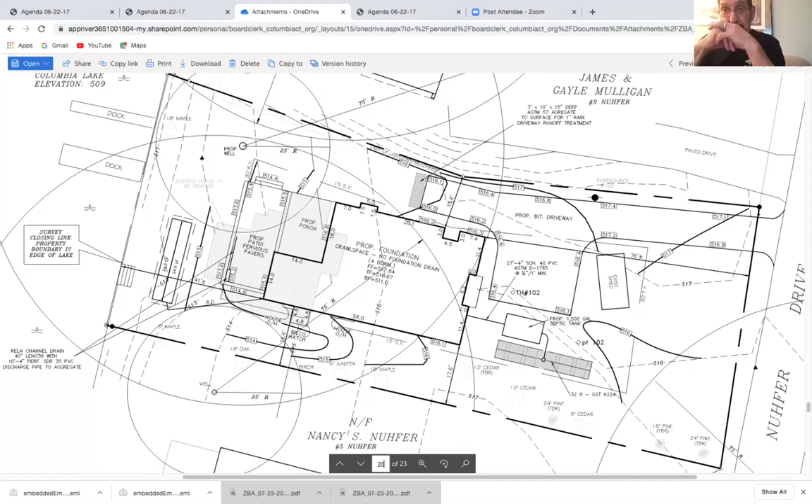When we consider coverage under our regulations, it's only permanent structures with permanent foundations, or attached to the permanent foundation. That came up with the front porch you can see there, which wasn't included in the coverage. So we had a discussion and the plans were revised — they won't have steps attached to the house. They're going to place freestanding granite steps, which aren't considered a structure because they're freestanding. So they've made accommodations to meet the coverage requirement.

They did the same in redesigning during the whole application process to make sure they met the height requirements, because under our regs, you can't exceed 25 feet when you're within the reduced setbacks. So they did redesign things to meet that as well.

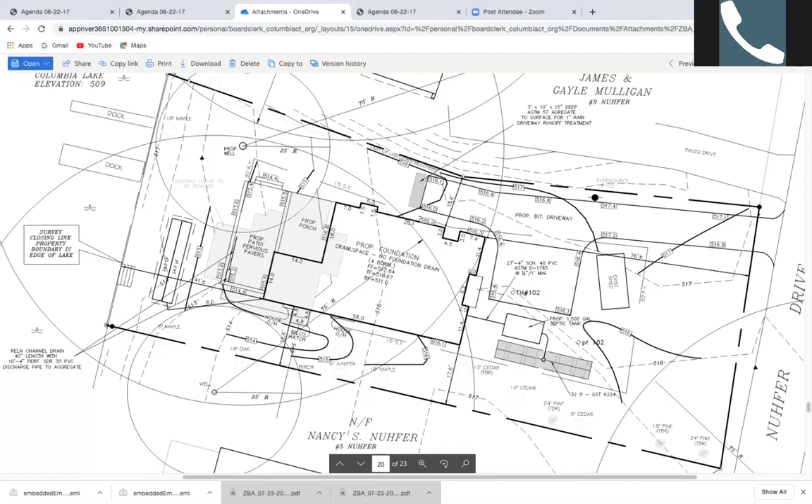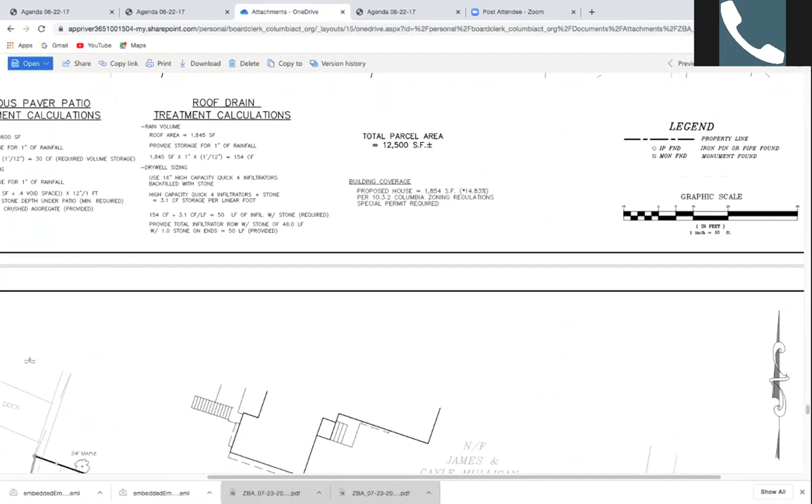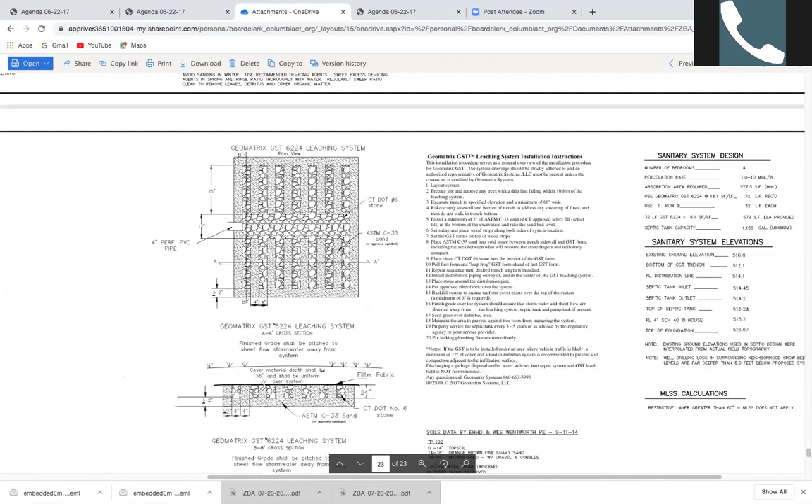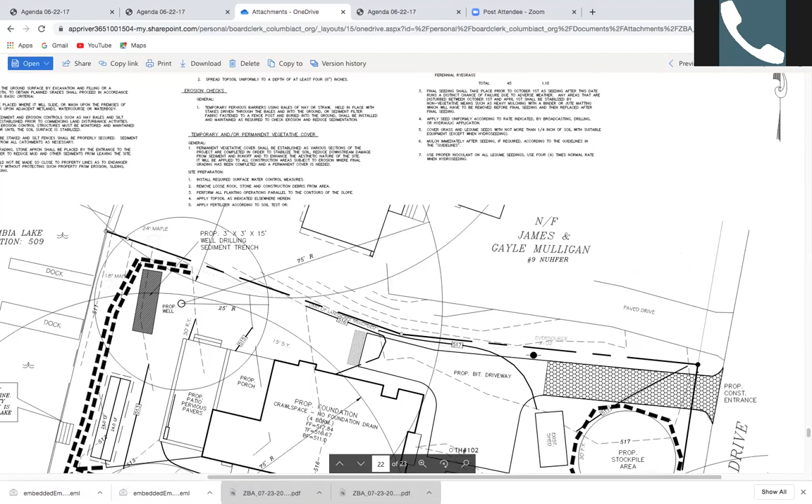Now, the existing house is 1,200 square feet, you said. Say that again, Jill. The existing house is 1,200 square feet. I thought — wasn't it 800? I'm not sure of that number. What's that, Mr. Chairman? The house you're tearing down, I thought you said it was like 1,200 square feet. I did not say that in my presentation. I don't know where I got it. It could be 800 square feet, Joe. Sounds close — 800 square feet. So that's even smaller. It's listed in the papers.

Just so the board understands why I'm asking these questions — you've got a 12,500 square foot lot, and they're proposing a building with a footprint of 1,854 plus or minus square feet. And then there's a second story to this. I mean, this house is going to be how many square feet total with the second story? Probably adds another 70-80% to the first floor dimensions, so I'd say a little over 3,000 square feet. Wow, that's a big house — that's a huge house on a small piece of property. I want everybody to understand that.

Did you say 3,000 square feet? Let me get that number — is that what you said? I'm estimating. I'll ask Mr. Sullivan to tell me what that number is. I think it's closer to 2,500. 2,500, okay, sounds better. There's an interior balcony upstairs.

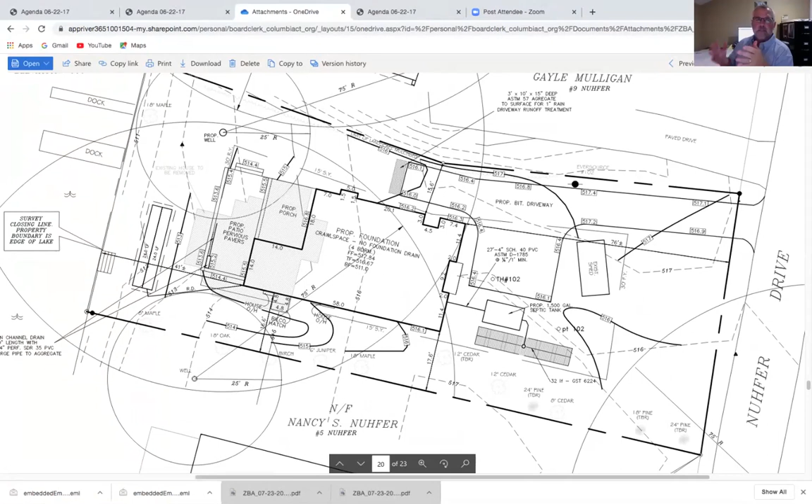I do want to point out that in the center of the lot, it's allowed to be a 35-foot high structure. This house is nowhere near that height. The ridge line runs east and west to try to minimize the impact from the street view, and the maximum height of the house at its highest point is a little over 27 feet.

27.2 feet, so let's say 27 feet 3 inches. It's not a 35-foot high house. The Sullivans did everything they could to reduce the scope of the height to the greatest extent possible.

Is there a garage with that? There is no garage, sir. So the 2,500 is living area? Yep, on 2 floors.

Thank you. I'd like to address the Sullivans, please. Is this going to be your residence, or is this a spec house? No, it is for our use. It will not be for our full-time residence. We do not plan to move in there, but it is not a spec house. We do not plan to sell this.

This is part of our family. We have three adult children, one of them is married, and they all live in this area. So it is for our family use, and it will continue to be for our family use.

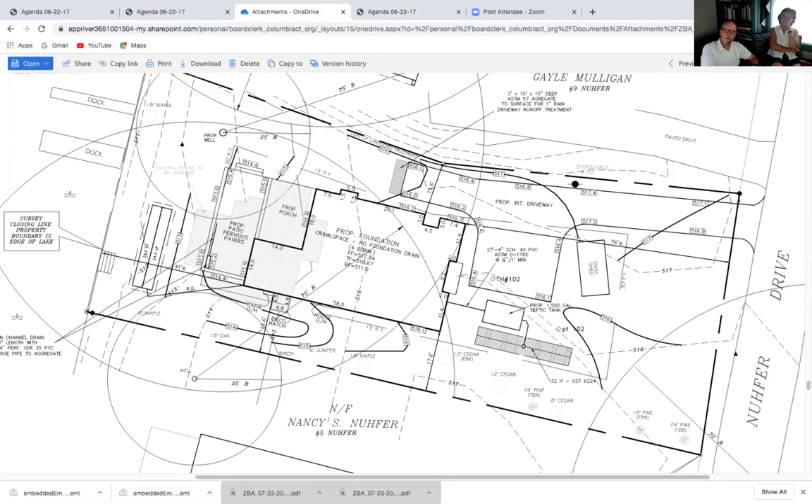I want to remind everybody, this is Joe, the chairman, that the reason this is here is because they're moving the well. Our special permit would allow this to go without coming to the ZBA under section 10.4.2, but because of this we get a shot at looking at it and asking ourselves if it's a big expansion to this small piece of property, and whether it will fit in.

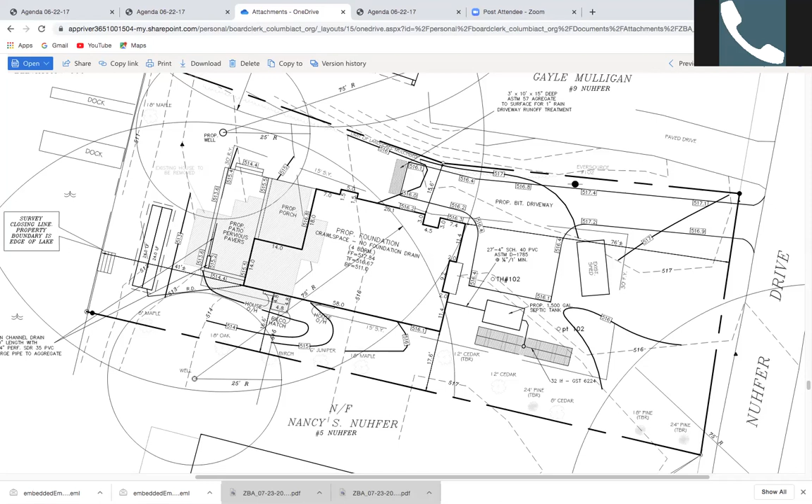Is it going to deter from the neighborhood? I walk by that place a couple times a week and know the property. There's good access to it, down Nuhfer Drive. It's nice and flat down there.

They are moving the house away from the lake from where it was before. It's a house approximately 2,500 square feet versus the previous house of 800 square feet. Sorry, I don't know why I had 1,200 in my brain.

I have a question. How far is the house going to be from the house next to it on Nuhfer Lane when it's all completed? To the south, the house would be approximately 45 feet to the next residence, and on the north side, approximately 36 feet between the houses. Okay, thank you.

Do the Sullivans wish to add anything to this? I think Wes has done a very good job representing that we're trying to build a house respectful of the lakefront community. We believe it's an improvement, taking the current septic conditions and moving them further from the water, improving that process, and we think it will improve the overall landscape within the lake. We work very hard to try to conform to all the rules of Columbia.